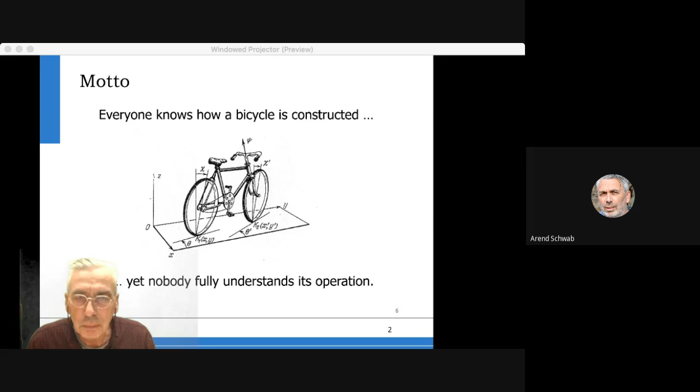Okay, so let's start with a motto, and the motto for this presentation is that everyone knows how a bicycle is constructed, right? I mean, it's two wheels and a steering assembly, and that's it. Yet nobody fully understands, and with nobody, I also include myself. Although I've spent more than 20 years now working on the topic, I'm not fully understanding how it works.

That's tricky. I couldn't have done this work by myself, of course. That's the nice thing of academia, you work together with all kinds of people. At TU Delft, of course, a whole list, but also at Cornell University - that's where the whole research started during a sabbatical year in 2000. And then UC Davis, and actually among the world everywhere where there are researchers interested in bicycle dynamics.

There are two key papers on this topic from our group. The first one is on the linearized dynamics equations for the balance and steer of a bicycle, a benchmark paper, that's with the Proceedings of the Royal Society, the journal in which Isaac Newton published, so we're among good friends, I think, there. The other one is in Science, where we say a bicycle can be self-stable without gyroscope and caster effect.

And we actually needed that Science publication very hard, because before the Science publication, everybody was saying, bicycle dynamics - I mean, bicycles are more than 100 years old, what's new? Go into nanoscience or whatever. I hope to show you that there are new things now.

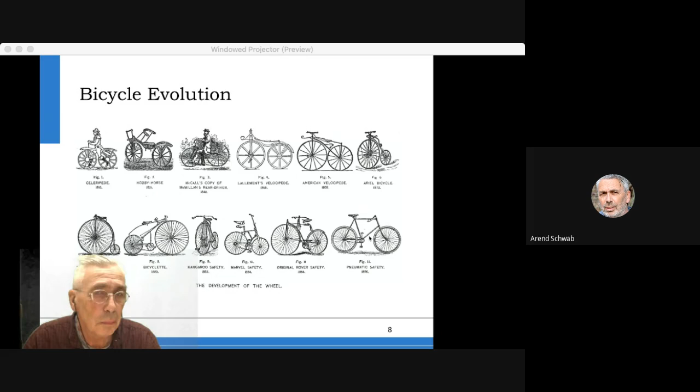2 equal-sized wheels, chain drive, and pneumatic tires. And if you look outside, and most of you maybe came to work today on this contraption, your bike nowadays is not so much different from this machine.

Well, at that time, around 1890, scientists also started to wonder about this stability. Both in the UK, Whipple, and in France, Carvallo, worked on models. And in the spirit of Einstein, you say we want a model as simple as possible, but not too simple. So we do a lot of assumptions to get down to the core of the problem.

So we assume rigid bodies, everything fixed to the rider, no control, everything is symmetric, idealized contact. So we have point contact and no side slip, a level road, no friction or propulsion.

And then when you think of that system, you end up with a bike which can move back and forth. That's 1 degree of freedom. Then it can tilt left and right, that's a second one. And then, of course, you can steer with your steering assembly, and that's a third one. So you have 3 degrees of freedom in this system.

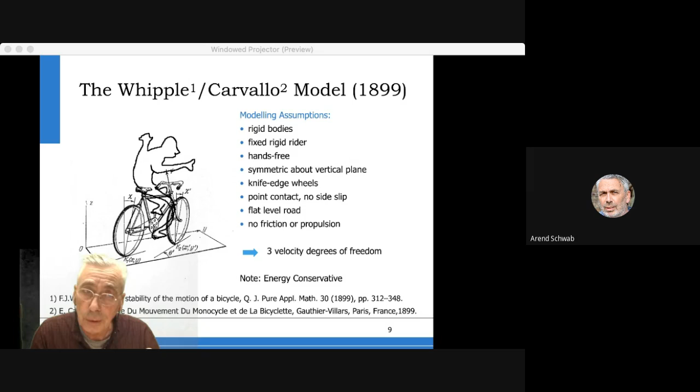And the big question is, of course, what is the dynamic behavior? To investigate this forward motion and look at the stability, you write down the equations of motion, which looks complicated, but it's just mass times acceleration is forces.

Now we wrote the forces on the other side of the equation, and we made linearized equations because we want to investigate stability. So we look at small motions of the lateral motions, the roll, phi, and the steering motions, delta, and of course the forward speed, v.

Now for straight ahead motion, for small changes, the lateral motions, so phi and delta, the rolling and the steering, are decoupled from the forward speed, meaning that forward speed is approximately constant. And for the lateral motions, we have 2 degrees of freedom, roll and steer. With those 2 degrees of freedom, we can investigate stability of the motion.

For that, we write linearized equations, we linearize them, we put in exponential motions, assume exponential motions. We write characteristic equations. It's 2 second-order equations.

We have 4 roots for this equation, and these 4 roots are a function of all the parameters. Now, we find this forward speed an interesting one, because at 0 speed, the thing just falls over, and given some forward speed, the thing stays upright. So forward speed is an important one.

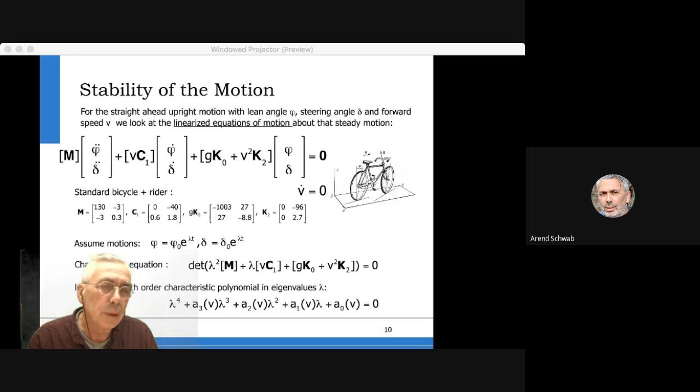So we plot these eigenvalues of the characteristic equation as a function of the forward speed. Here we see the eigenvalues. In blue, we have the real part of the eigenvalues, and in red, we have the imaginary part. The blue part determines if it's stable or unstable: positive is unstable, negative is stable. And the red one, the imaginary part, is the oscillating one.

So we see at 0 speed, that's around here, we have 4 roots, and they are equal and opposite, like a double inverted pendulum, because the thing is not moving. Then at some forward speed, around this speed, 2 roots coalesce, and we find a complex conjugated pair, meaning an oscillation starts. And that's the motion we saw, that this roll motion is oscillating.

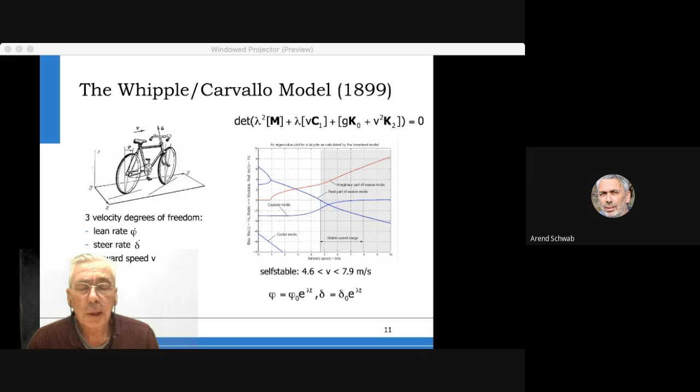Then, of course, it's still unstable, this motion, and then at a certain speed it becomes stable. And actually, after a certain speed, all motions are stable. So this very simple model already explains that a bicycle can be self-stable from a certain speed on.

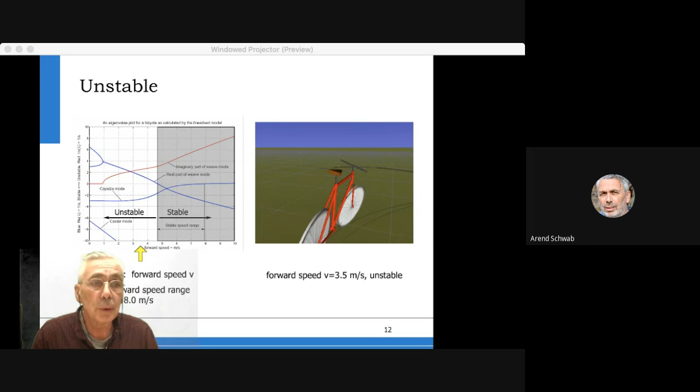Now, to show that it's not about real small motions, we make a full nonlinear model and simulate it in a computer. At low speed, you hit it, it starts oscillating, and you crash. This is actually exactly what happens when you learn how to ride a bike, because you think it's dangerous, you go slow, and when you are slow, you're unstable, and you start swerving, and then you fall over.

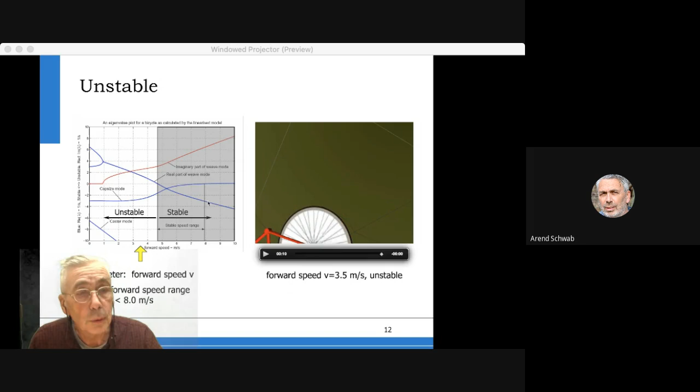Now we go from this unstable region, to the stable forward speed region. Then we do the experiment again. We hit it sideways, and then you see this oscillating thing, and you see the oscillation dies out. So yes, even the full nonlinear model of this 3 degree of freedom model for a bicycle already shows this stability behavior.

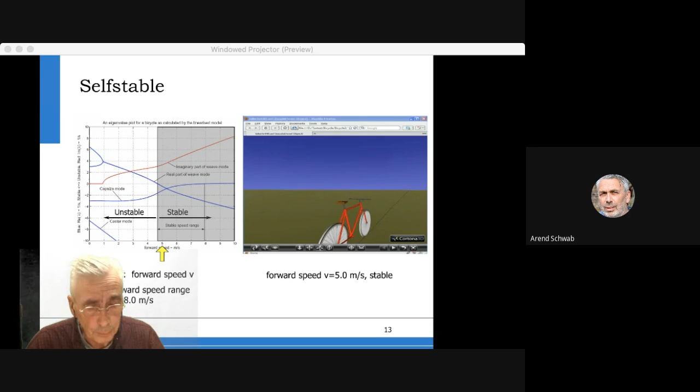Okay, remains the big question: this bicycle stability, self-stability. Where does that come from? I always call it some auto-magic control. So the big question is, how can the bike stabilize itself? Actually, that's a very tricky question.

So let's go back to our own world and say, hey, how do we balance a bike? Because at slow speed, the thing is unstable, so we have to do something. So then you have to think, what am I doing? Well, actually, that's also a tricky question, because you have no clue. You are moving with your upper body, you are steering, and it's not completely clear what you are doing.

So we go back to one easier problem even, and that's, how do we balance an inverted pendulum on our open hand? So this is our hand, and here we have this inverted pendulum. If it falls to the left, you quickly move your hand to the left to move the support. And if it falls to the right, you quickly move your hand to get the support under the center of mass. That's the way how you balance a stick on your open hand.

Now, in the same way, a bicycle is like a stick, and the hand is the world. So you would say, oh, then I have to move the world to balance a bike. That's a bit tricky to move the world. But what you have in a bicycle is a steering assembly. If the bike has some forward speed and you operate the steering assembly, you are able to move the contact points laterally. If you move forward and you steer to the left, then you can move your contact point to the left. So by steering, you can move your contact points.

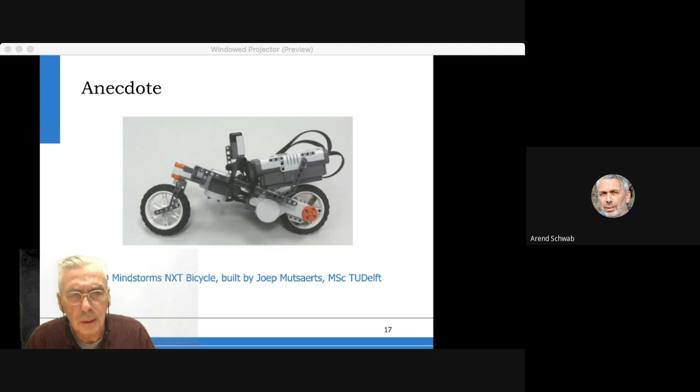But he couldn't get the thing working. Whatever control program he put in, it didn't work. And he was in a hurry to go to his internship in Switzerland, and people said, well, in the back there's the bike lab and there's Professor Schwab, and maybe he can help you. Well, Joep came in, and I said, yeah, sounds like a doable job.

Let me see, you have a steering motor. It's a DC motor, right? Direct current. So the amount of voltage means a certain torque. You have a lean rate sensor. Well, you have to steer into the lean. So let's apply a voltage which is proportional to this lean rate, and let's do it 10 times of 100, or minus 10 or minus 100. You have to fiddle a little bit with the feedback gain and the signs, and that should work.

And then Joep looked at me in the face, and he said nothing. He just looked at me. I said, yes, Joep, what's wrong? He said, well, it's only one line of code in my controller. I said, yeah, okay.

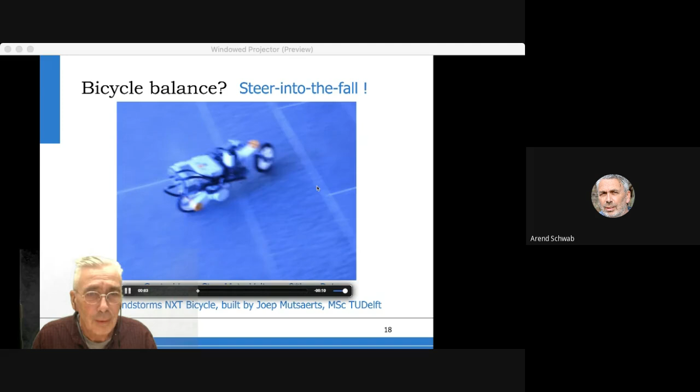And then Joep went away, and I think after 4 minutes, he came back with this video. And this is clearly a demonstration that to balance, you have to steer into the undesired fall. It works. The thing is self-stable, right?

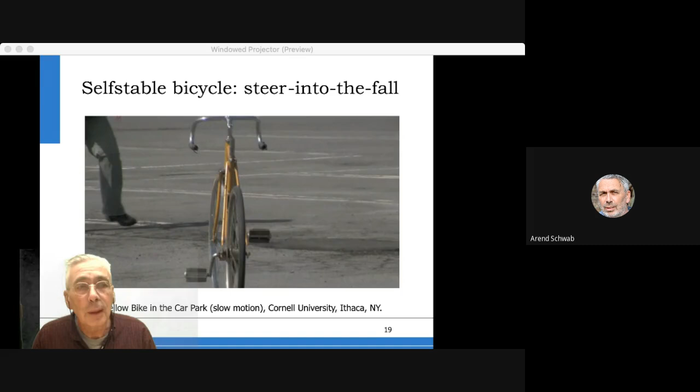Actually, if you look at the slow motion video of a real bike, you see it falls and then it steers into that fall. It falls and then it steers into that fall. Meaning you see this steering into the fall as a stabilizing motion, a stabilizing mechanism, clearly also in a real bike.

Remains, of course, the question: why does it steer into the fall? So why does it steer in the right direction, at the right time, and the right amount?

Actually, there are two groups explaining this self-stability. And it's like in real life, with the Sneetches, or with the red and the blue and the left and the right, you always have two opponents.

One opponent says it's the gyroscopic effect of the front wheel. So the front wheel is a rotating body, and the rotating body is falling, and then there, about the third axis, there's some torque, and it will stabilize.

But actually, there's another group, and they say, well, no, it's not about the gyroscope, it's about the steering geometry, because this effect is very small, and it's that the steering axis hits the ground in front of the contact point. So the contact point is behind the steering axis, and you can compare this to a caster wheel, which is under your desk chair or in your shopping cart. So they say the trail is the most important part.

Now, first start with the gyroscope people. Well, this gyroscope explanation already started around 1910 by two, what I call, half-gods: Klein and Sommerfeld. Felix Klein, famous mathematician from the Klein bottle, and Arnold Sommerfeld, who was nominated 84 times for the Nobel Prize. They wrote a 4-volume book, about this wide, the 4 volumes on the shelf, on Theorie des Kreisels, which means theory of gyroscopes. And of course, when you're in gyroscopes, wherever you look, you see gyroscopes, right?

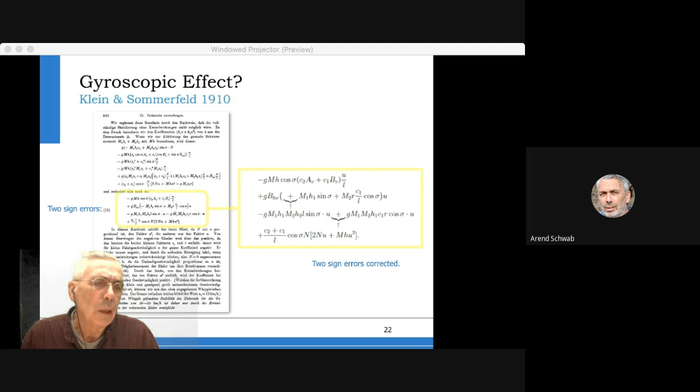They knew their classics, so they used the Whipple Carvallo paper. They derived the equations and showed that if you kill the gyroscopic effect, the bike can never be self-stable. Well, unfortunately, my colleague Jaap Meijaard went meticulously through the whole 1910 calculation and discovered two sign errors in it.

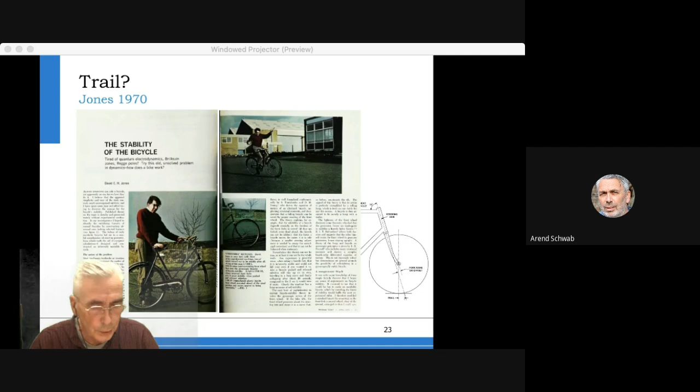He derived this using potential energy, to show that with a positive trail it's always stable and with negative it's always unstable. However, that was based on potential energy, and potential energy in a stationary bike is identical to that in a moving bike. If you correct for the dynamics, including that dynamic effect, it's not so obvious anymore that you need a positive trail. Maybe you can also do it with a negative one.

So both explanations, gyro and trail, are not sufficient to explain why the bike stays upright. So what do you do? Well, you go back to your equations again and formulate the stability criteria.

The equations have 25 bicycle parameters, like wheelbase, trail, head angle, mass distribution. All these 25 parameters go into the equation of motion, into the characteristic equation of Hurwitz, and the Routh-Hurwitz stability criteria tell you that all these coefficients, A, B, C, and D, have to be positive. And all these A, B, C are functions of these 25 parameters.

If you want to find out for what condition that holds, for which parameter combination, you probably can print out all these equations and paint the walls of the whole University of Malaysia with that. It's an exploding thing. So that's undoable for those 25 parameters.

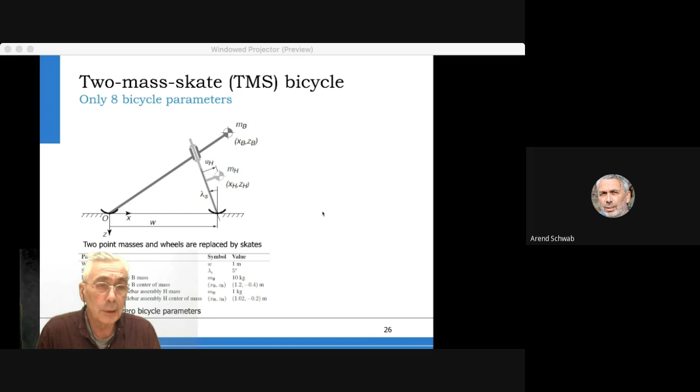As you can see, it has no gyroscopic effect because it's on skates, and it has no trail because the steering axis hits the ground at the contact point. So this is clearly a bicycle with no gyroscopic effect and no trail, and we will show you that the thing can be self-stable.

For certain combinations of mass and mass distribution - those conditions aren't so interesting for now - we can find regions where from a certain speed on, the thing is always stable. Of course that's stable without gyroscope or trail. So it's not a necessary thing to have a gyroscope or trail. A bike can be self-stable.

However, you would think, well, this is linearized dynamics, and maybe it's only true for small numbers. So let's build a prototype and do the experiment.

So we built the prototype: you propel it forward, you release it, it stays upright. Next, you propel it forward and hit it sideways - you'll see it oscillates a little bit and then stays upright. And this is the proof that a bicycle can be self-stable without gyro and without trail.

Remains, of course, the question: how does it stay upright? Well, that has to do with this strange mass distribution - the mass of the rear frame is high up and the mass of the front frame is lower and in front of the steering axis, meaning that if the thing falls over, the steering will follow in that falling over.

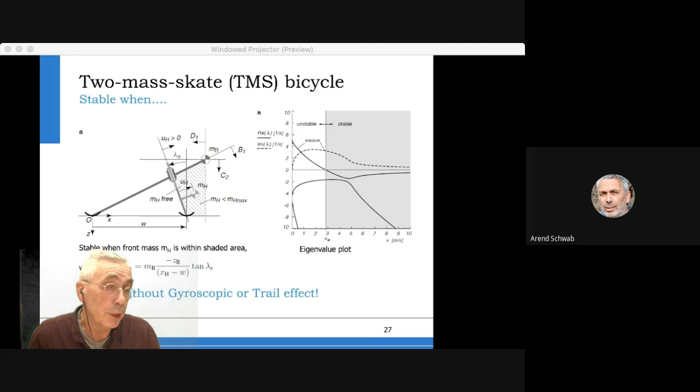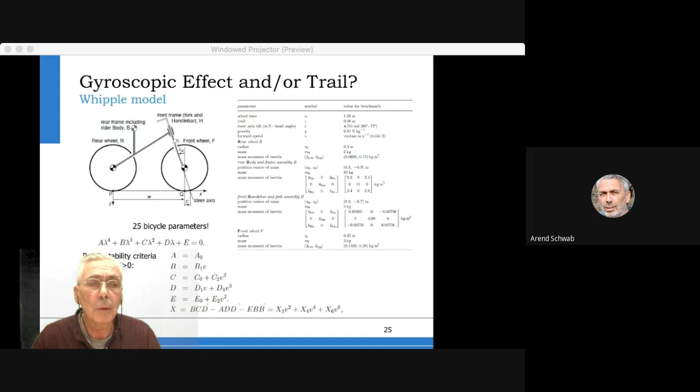The explanation here for self-stability is that it's self-stable because of the mass distribution. But the bottom line is that with these bicycles, with all these 25 parameters, you can play around to get self-stable bicycles in many, many ways. You can play with the gyroscopic effect, which is helpful but not necessary. You can play with trail, which is helpful but not necessary. And you can play with mass distribution, which again is helpful but not necessary. By playing around, you can make all kinds of contraptions with all kinds of dynamic behavior, stable or unstable.

I want to point out that this presentation is very techy, but after our publications, people on YouTube and in the real outside world got interested, and they made very nice short videos of about 10 minutes explaining and demonstrating this in a nice graphical way. Minute Physics has a nice one showing our work, and there's also a cool one on Veritasium. I think this is being recorded, so afterwards you can pick up the links and look at them. They're very well made, but it's all based on this work, of course.

So yes, the bike can be self-stable from a certain speed. Still, we also ride at slower speeds, and we're able to control that thing. The big question is, how do we control that unstable bike? And secondly, why does one bike feel so much different than another? If you have a racing bike, a mountain bike, or a city bike, they all feel different in behavior and control. How does that come about?

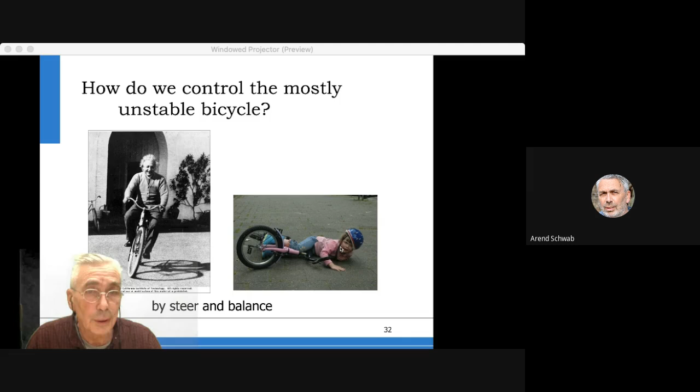Now, a short intermezzo, and it's a question. If you ride your bike and you want to turn to the right, what do you do? I used to ask that in the audience and get answers, so I'll give you a second to think about it. You ride straight, you want to go right—what do you do? I think most people out of the audience would say, well, you steer to the right, of course, because you have to go right.

Correct? Well, actually, it turns out that to go to the right, you briefly steer to the left, and then you just let go. That sounds very strange, but if you look at this simulation video, I steer to the left, and bang, the bike falls over. Now let's do that in slow motion. So here again, I move forward, I steer to the left, and what happens is my contact points go to the left, so I fall over to the right.

And that's exactly what I need, because to make a right turn, you have to have some lean angle to the right. Now, you cannot push against anything, so how do you get your lean angle to the right? Well, there's only one way: by moving your contact points to the left. And how do you move your contact points to the left? By steering to the left.

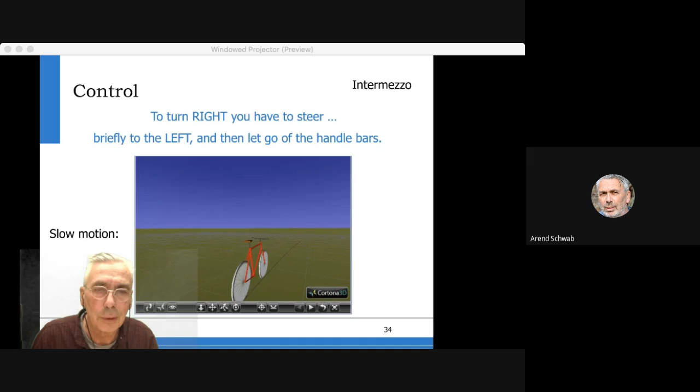So it's a thing we all do unconsciously. And if you say, 'I don't do that,' well, just start riding a bike. Instead of holding the handlebars with your hands, push against them with open hands—push a little with your right hand, and you will fall. You'll notice, oh, I steered to the left. So then you steer to the left, and you finally get into a right turn. Just do the experiment yourself—it's pretty cool.

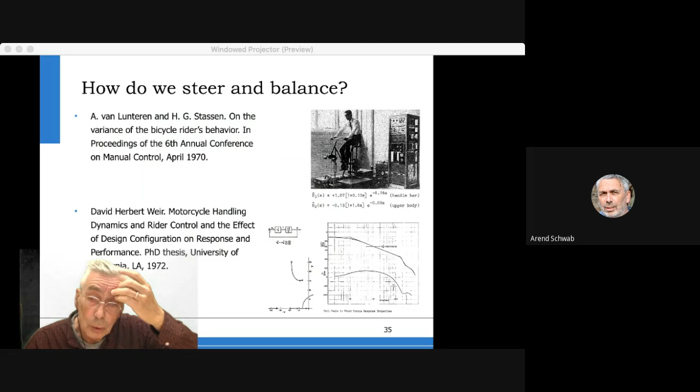The question about steering balance is older. At Delft in the 70s, people were interested in whether we should prohibit people intoxicated by alcohol or drugs from riding a bicycle. They wanted to do experiments to see how well you still behave while intoxicated on a bike, but couldn't do it on a real bike, so they made a simulator. You see here a picture of this bicycle simulator from the 70s, and they measured the behavior of the rider. A lot of people were interested in participating because it was free alcohol and free drugs - and that's the Netherlands. The outcome of the research was, yes, it's dangerous, so by law it's forbidden.

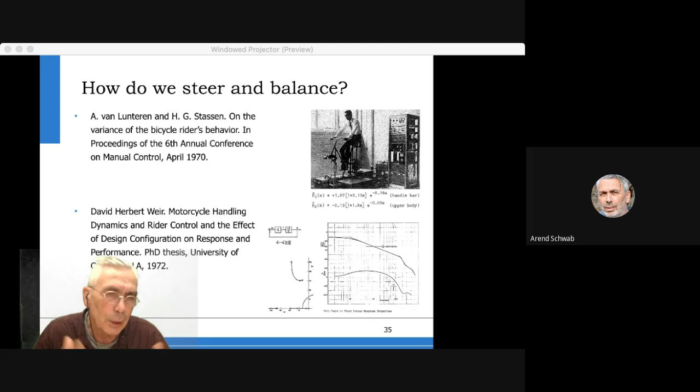After that, nothing much happened in bicycles, but on motorcycles a lot happened, because in the US around the 1970s the Department of Transportation thought there were so many accidents with motorcycles that maybe these vehicles are inherently unsafe. A large research program, mainly led by David Weir, started by theoretically looking into the dynamics and control, and then experimentally looking into that. The conclusion was: no, they're not inherently unsafe. It's okay, but it's a very strange control behavior which you have to learn - steering to the fall.

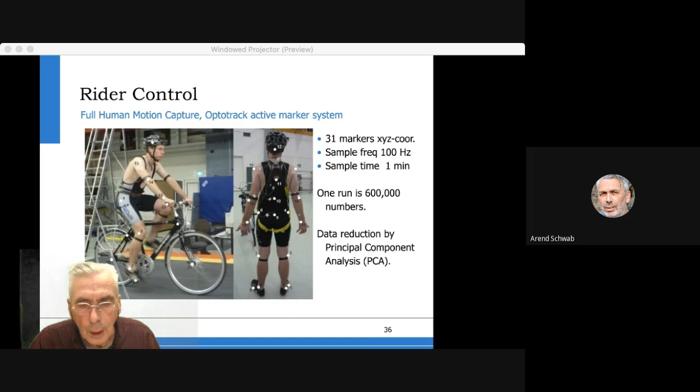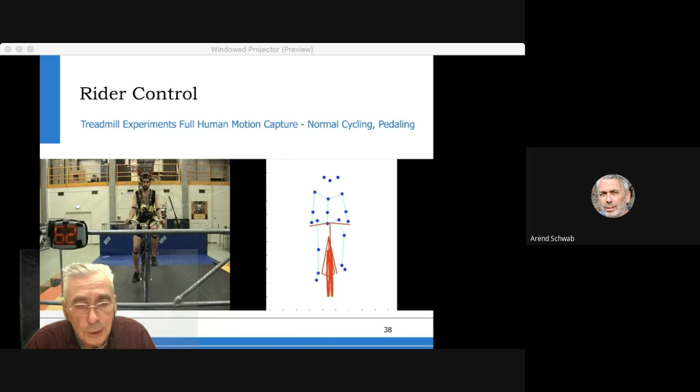We were interested in what you are doing, because if you think about the control, you think, oh, I steer and I lean - what do you do? So we set up a rider with full human motion capture, riding on a treadmill at various forward speeds, and observed the motions. On the left you see the rider, on the right you see the reconstruction. The conclusion was that if you order the motions of the bicycle and rider, the bike moves most, but all the control is mainly done by steering. Only at very low speed is some control done not by upper body, but by moving your knees in and out - that's this part.

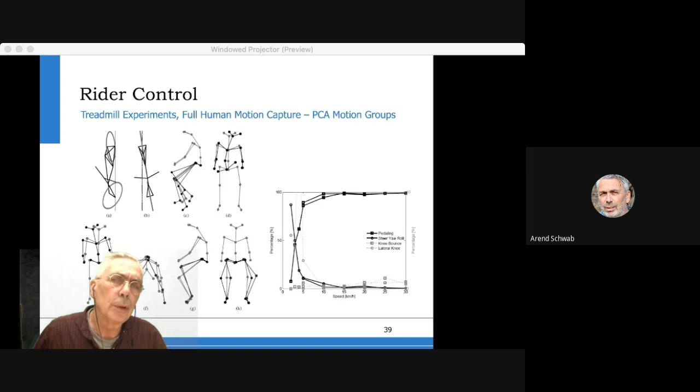So the upper body motions are not control motions - they are just dynamic motions, because the bike is moving and you have two masses that have to move relative to each other. So the conclusion was that all control is done by steering. That's important, because from a control point of view, you have a system with multiple outputs but one input being the steering control.

All very nice, these stories about dynamics, stability, parameters and whatever - very techy, but what is the relevance to society? Well, the relevance is that we have a zero goal in traffic regarding death and serious injury, and for cars we're getting there slowly. But for bicycles, we're going up instead of down - every year more and more cyclists get killed in traffic and are seriously injured.

It has to do also with exposure, because people are getting older and staying longer on the bike. But if you look in detail, 80% are elderly, and they are not hit by a car or truck - they just fall over. 75% of these accidents are single vehicle accidents, meaning they just fall over with their bike. The bike stability - the control, the handling, the stability - plays an important role there. So that is actually relevant for society.

Can we improve that? We have a number of projects for that, both in consumer industry and sports engineering. In consumer industry, there were questions about the safety of regular bikes and e-bikes for elderly people. We compared them in a large test, and showed that although elderly people seem to go faster on an e-bike, they actually go as fast as middle-aged people on a normal bike, and it's not unsafe. What is unsafe for elderly is mounting and dismounting, and starting and stopping - but not riding. That turned out to be the conclusion.

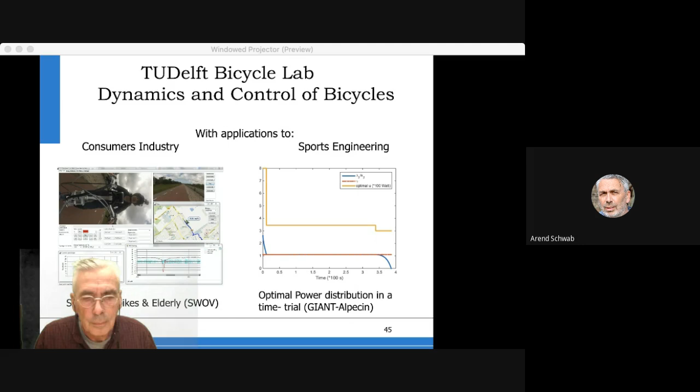Then in sports engineering, we started with the then Giant Alpecin team, now called Sunweb. We began by looking at optimal power distribution in an individual time trial, and later went on - I'll also tell a bit about team time trials. So those are two application fields. For stability, we were very interested in whether we could do safe experiments indoor instead of outdoor, so we were always fantasizing about some bicycle simulator.

The main thing is that you have to have good haptic feedback on the handlebar, so you need a motor which gives you the right forces, which you feel in cycling. We discovered that the head-mount display is too immersive, actually, so it's better to have screens, but this is an ongoing project.

Then again, in the consumer industry, with the e-bikes, we have this step-through frame, and they show this very unstable shimmy behavior. So if you let your hands go of the handlebar, then suddenly you have this high-frequency behavior. Race cyclists, elite cyclists know this also.

We were able to make a design tool so that designers can build a bike, design them, which is then shimmy-free. On the other hand, for the consumer industry, we say, well, if people cannot stabilize the bike, why don't we let the bike stabilize itself?

So we add a torque motor to the steering assembly, and that adds a torque which stabilizes the bike, which makes it easier to control. And actually, you have to do nothing, because it controls itself.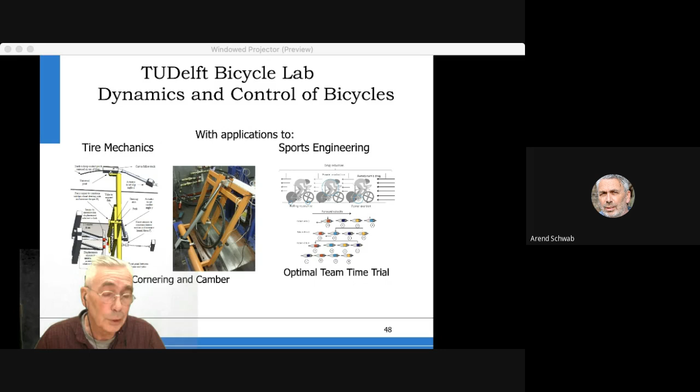And then the Sunweb team said, yeah, that's very nice, but we're not going to do that. Yeah, but this is the optimal solution. They said, this is too complex, we cannot execute this. So we had to tune down a little bit, but I think in the Giro, the competitors found the Sunweb team very good at the team time trial, by surprise. So their new switching behavior was pretty good.

We also looked for the sports engineering at descent. So the big question is, why is one descender so much better than another one? And we said, well, let's first observe.

So we have a measurement bike. This bike is full of sensors and cameras, and then we can record how a good rider is going downhill, and from that we can give instructions to novice riders with Google Glasses and other things. We can guide them then in what is the ideal line, when to brake, etc. This is still an ongoing project.

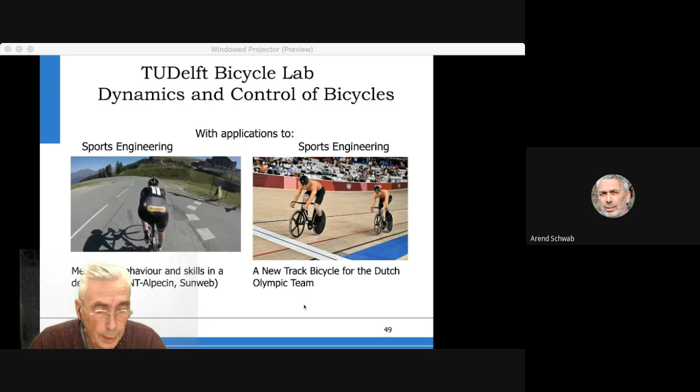And then for the Dutch Olympic team, we built a new track bicycle for the Olympic Games in Tokyo. And I want to focus a little bit more on that, a new track bicycle for the Olympic team. Yeah, I think I have 5 minutes for that. That's good.

So for the Olympic Games 2020, the team wanted to have a new bicycle. And the bicycle was originally a Koga bicycle, a Koga Miyata. This is the original bike. And then the question was, of course, why do you want a new bike? And then they said, well, because we want a new bike. It's totally unclear. Are you not happy with this one? Yeah, but a new one is better.

Okay, so then Koga formed very, very wisely a multidisciplinary team with TU Delft for handling and control, Pontus for the engineering, Actiflow for the fluid dynamics, and then we were aiming at Tokyo 2020. So, well, the first thing we did was, of course, we observe.

What is going on with the current bike? If you look closely, this is not an ideal configuration because your knee is hitting your elbow. As an outsider, you'd say the bike is too small, or the person is too large, but we cannot change that. Look at this guy, this is horrible, right? You don't want this. You have to put a lot of attention and control into not hitting your elbow.

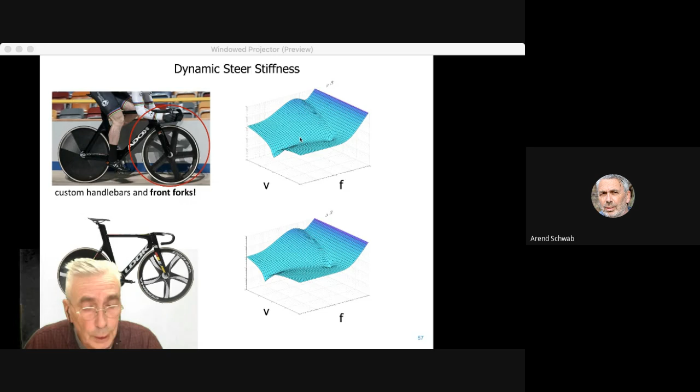For the new bike, for every rider, first of all we made it such that they have the ideal position, meaning we have 3 different sizes of bikes. Every cockpit is totally individual, plus the steering geometry is also adapted to have this certain stiffness at this speed region.

The bike was introduced, and of course we as engineers were really sitting there like, I hope it works, right? Well, already at the World Championship in Berlin, before the Olympics, there was a phenomenal world record by one of the Dutch riders. So we thought, okay, it's probably gonna work.

And then, of course, at the Olympic Games, which were 2020 but staged in 21, we had 3 gold medals, 1 silver, and 2 bronze medals. And of course it's the riders who get the medals, but I think the bike was also helpful in that.

I have 20 seconds left, right? And I think this concludes the presentation. All right.

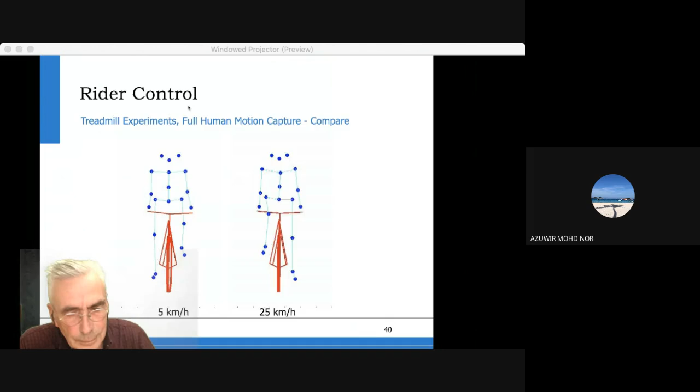In one of your slides, you said that in order to turn right, you have to steer briefly to the left and then let go of the handlebar. Can you explain more why we need that brief turn to the left?

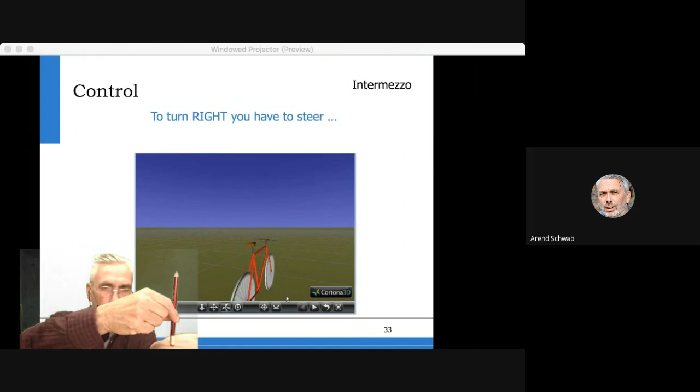Yeah, I can explain. I have to go back to my experiment of the stick on the hand, right? So if the stick falls to one side, what do you do to balance it? You move your hand in that direction. So you move the support in the direction of the fall. If it's falling in this direction, you move your hand in that direction, and if it's falling the other way, you move your hand accordingly. So if the stick falls to the left, you move your hand to the left to get the support underneath it, and likewise to the right.

With a bicycle, you'd like to do the same thing - it's the same principle, to balance the whole thing. Sorry, I'm on the wrong slide, let me get to that one. Okay, now with a bicycle, you'd like to do the same.

But how do you move the contact points of a bicycle? With the stick, you move your hand, but with a bike you'd have to move the earth, right? However, with a bike, when you have a steering wheel, and if you're moving forward and you turn the wheel, the contact point will go to the left, or if you steer to the right, it will go to the right. So on a moving bicycle, with your steering assembly, you can move your contact points.